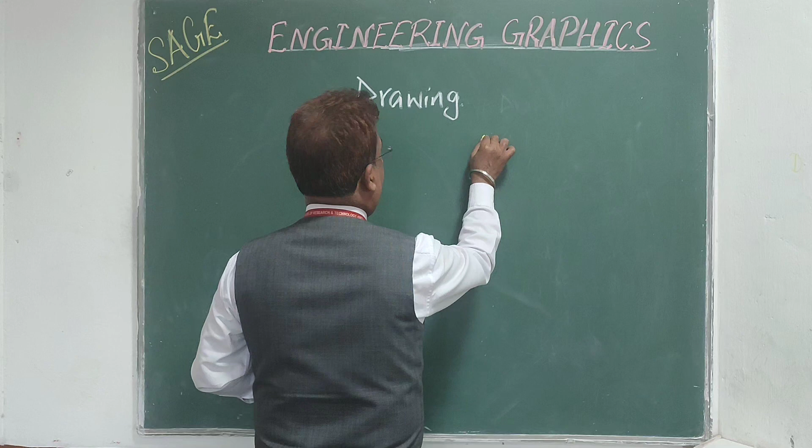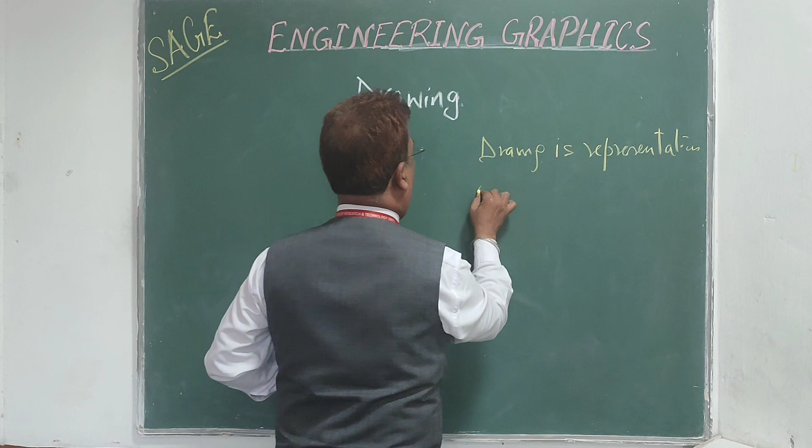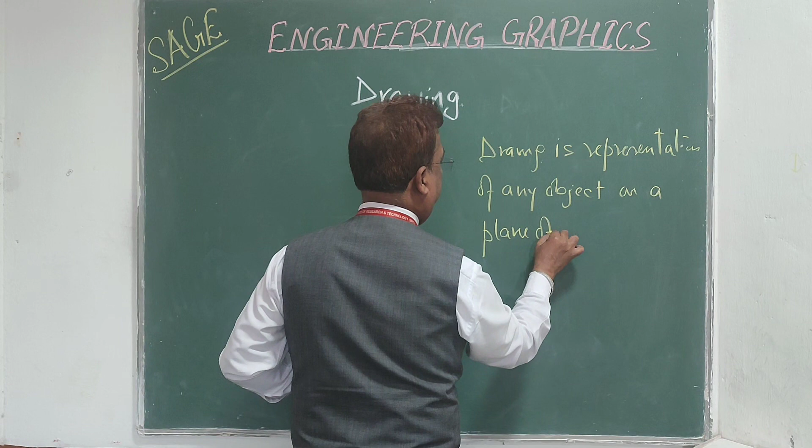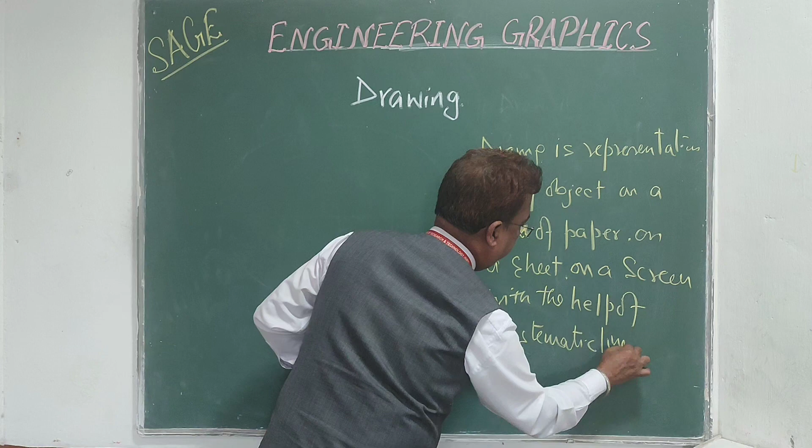So if I want to define drawing, the simple definition is: drawing can be defined as the representation of any object with the help of systematic lines. I am using this word systematic lines, which is very important. Drawing is a representation of any object on a plane of paper, on a sheet, on a screen, or maybe on this board, with the help of systematic lines.

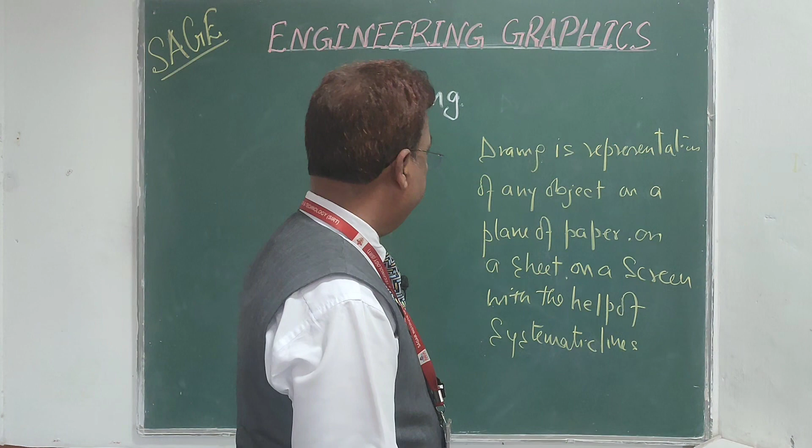I am giving stress on systematic lines because if you draw something systematically, then I can understand it. Otherwise, when a child draws lines on a wall or floor with a colored chalk or sketch pen, that may be a drawing according to them, but we may not be able to understand it particularly. So this word, systematic lines, is important.

As you know, when we study geometry in school, we draw geometrical figures. If you want to draw a square, there are 4 lines required, all making 90 degree angles with each other, with equal side lengths and equal angles. If you draw that figure without mentioning it is a square, I can see the figure and judge that it is a square. That is the advantage of using systematic lines.

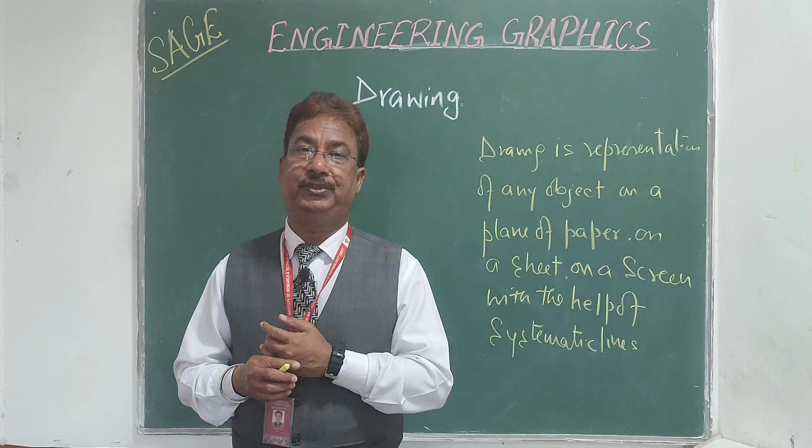It is rightly said that drawing may be one of the oldest languages a human can know. If you remember the earlier days, even during the Ashoka period, that language could not be studied by people. But from those drawings made by ancient people during the cave ages, we can still understand how humans were at that time, how the animals were, what type of weapons they used, and what agriculture they produced. So drawing is one of the ancient languages which is still readable.

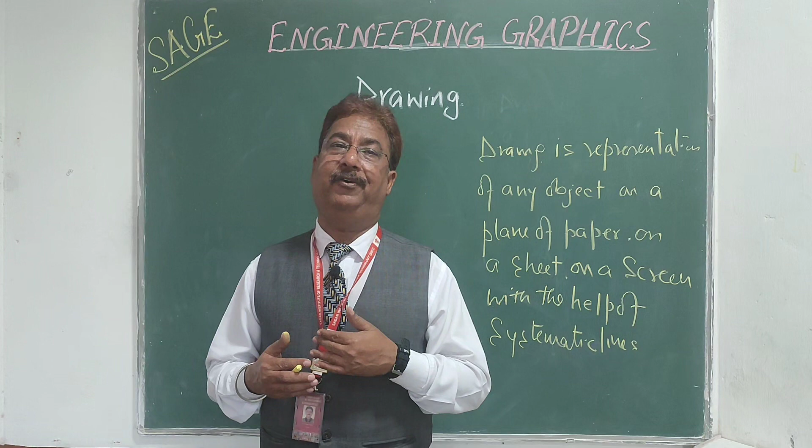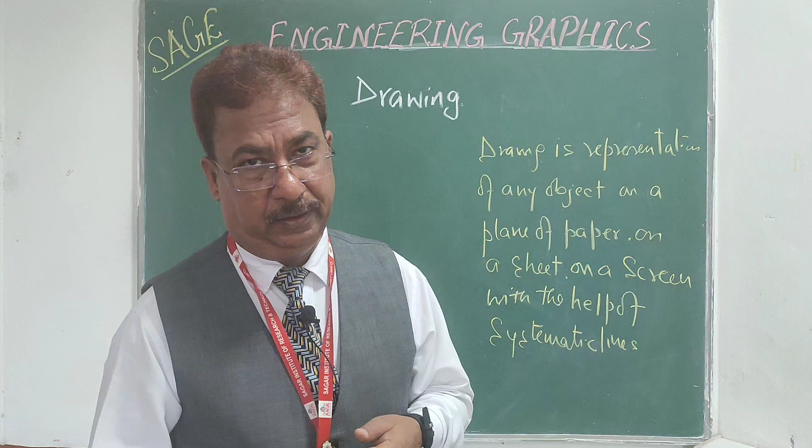Otherwise, many languages are now obsolete and we cannot understand what they have written. So if I consider written language, the oldest written language for human communication would be drawing. That is the importance of drawing. Also, whenever an idea comes to our mind, the easiest way to express that idea is with the help of drawing.

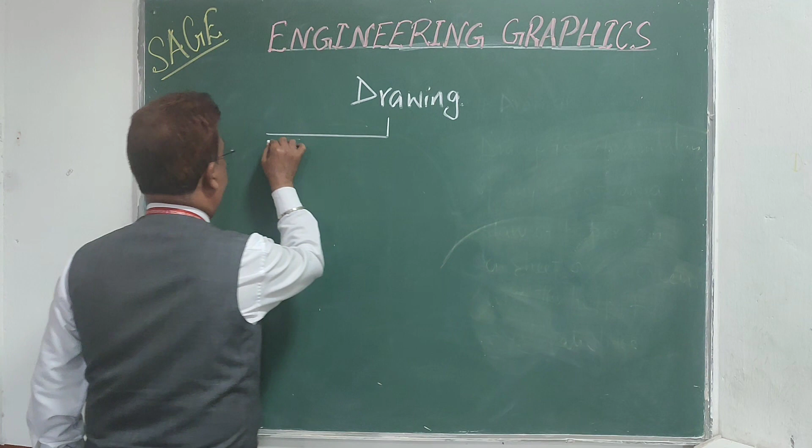Drawing can again be classified into two types. One is known as engineering drawing, which is our subject in engineering. And the other classification is artistic drawing.

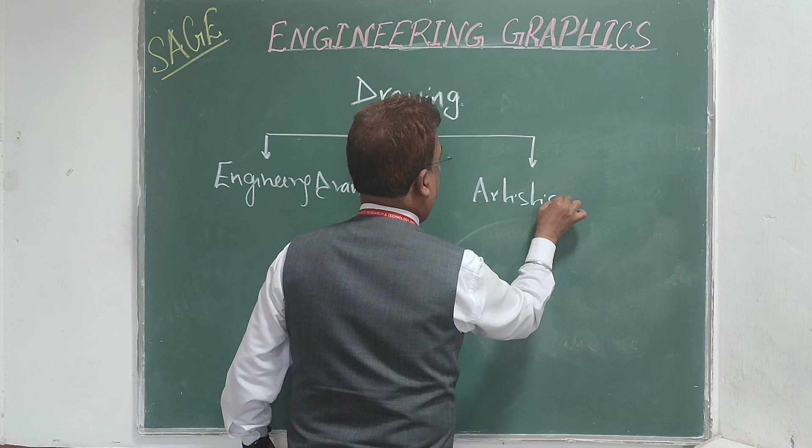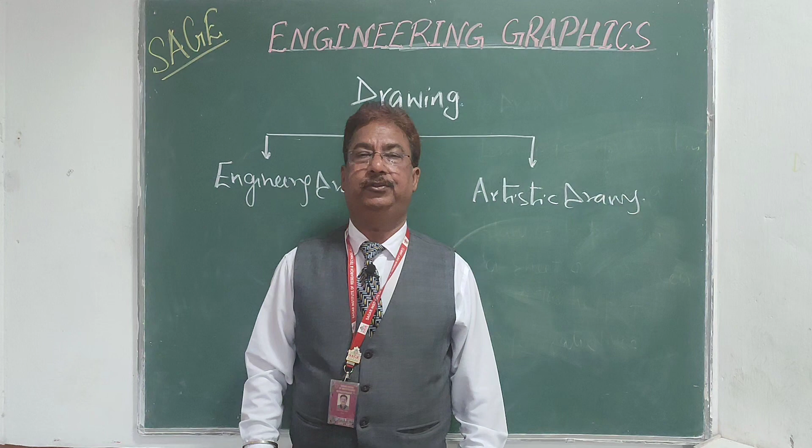Normally when we talk about the word drawing, if I ask how are you in drawing, what do you think about drawing, people will say that drawing means artistic drawing, the artist that can draw with the help of freehand.

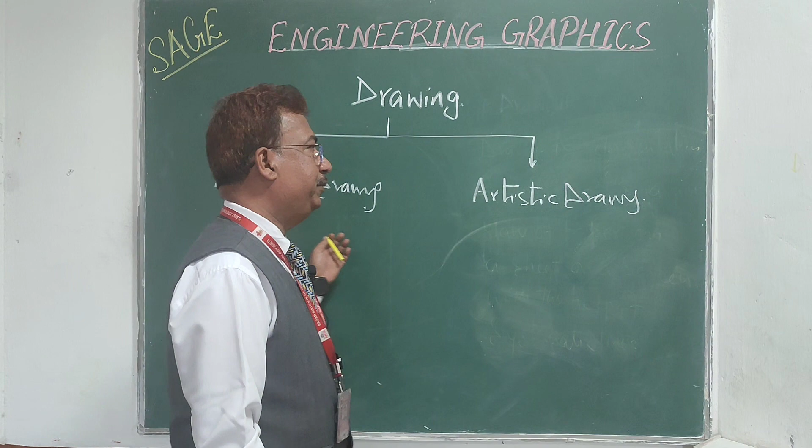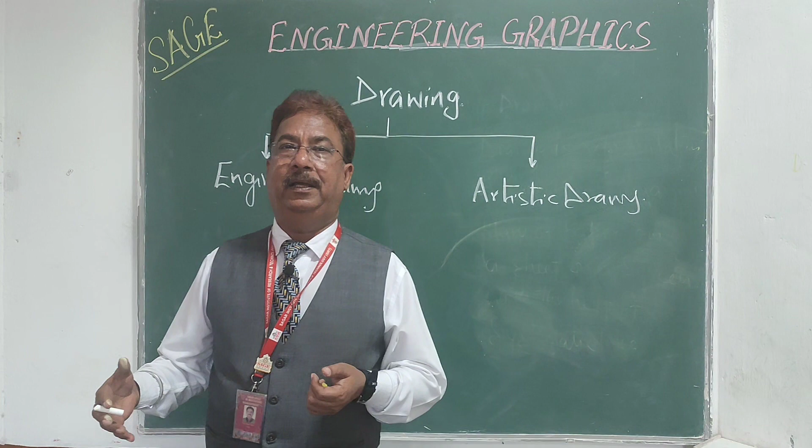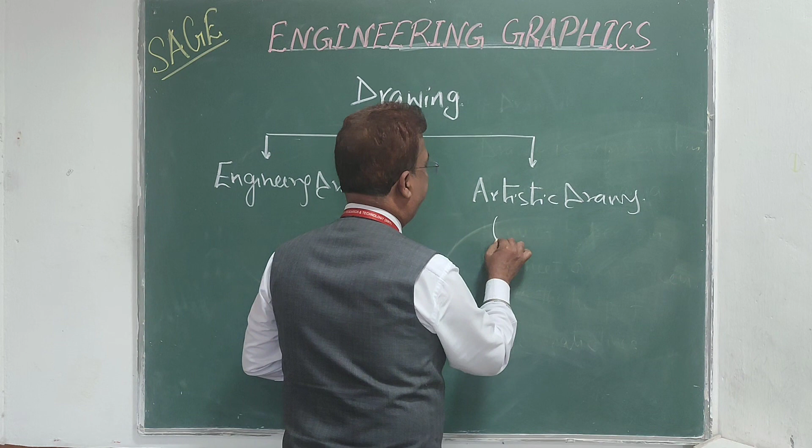But there are two types of drawing: one is engineering drawing and the second is artistic drawing. Sketching is one of the primary ways to express our ideas. If I have some idea about developing a machine, building a new structure, some thoughts are in my mind, so at the initial level what I can do is freehand sketching. This artistic drawing is one way to express our idea with the help of freehand.

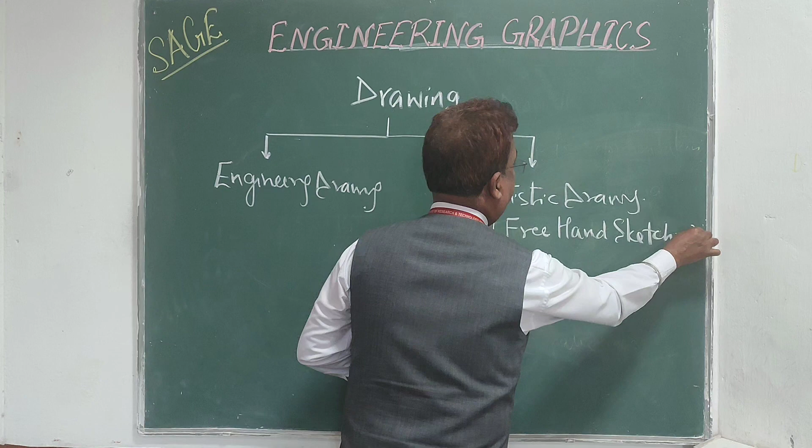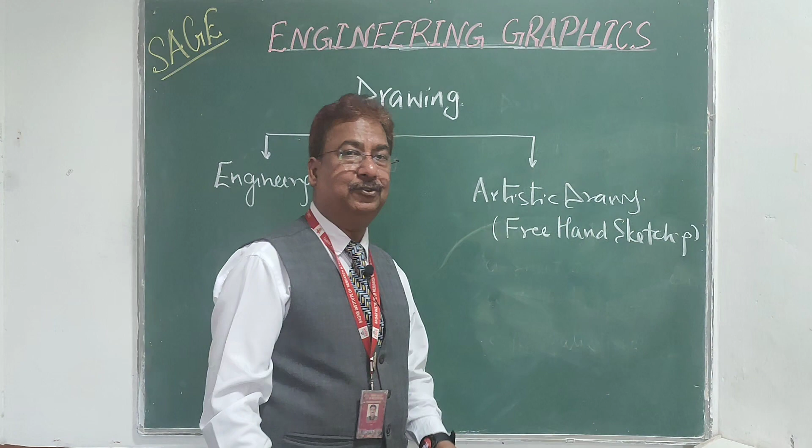So at the initial level, even in engineering, we can draw freehand sketching, but later on we finalize and fix that with the help of instruments and dimensions, and that drawing is known as engineering drawing. So the basic difference between these two is: artistic drawing is freehand drawing, and engineering drawing is drawn with the help of instruments.

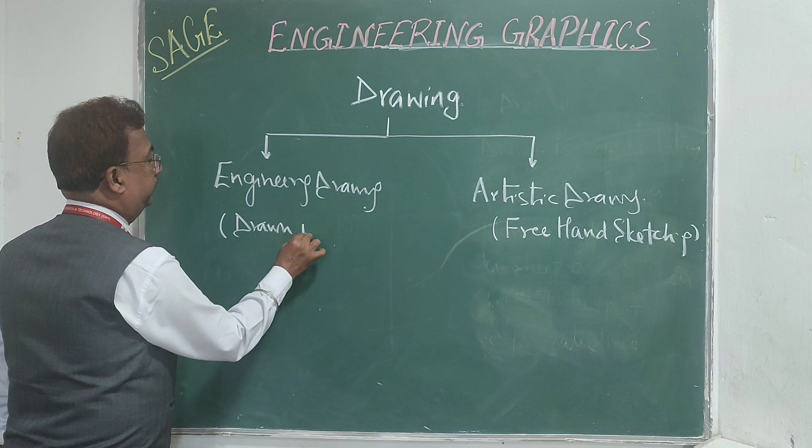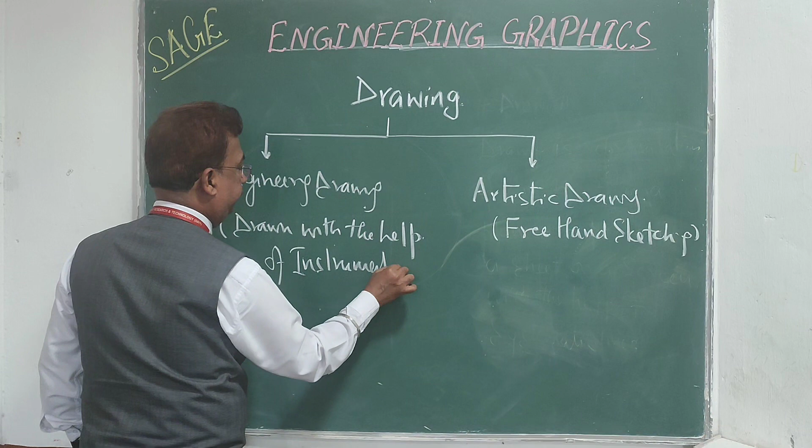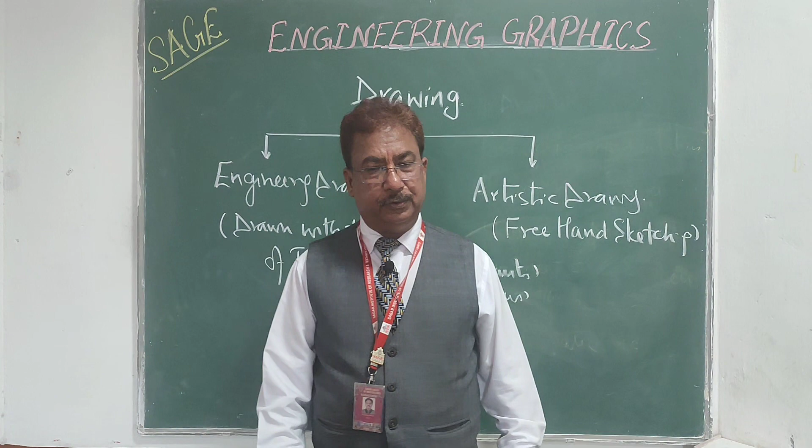And measurements, or you can say with the help of dimensions. So in engineering drawing we use simple tools, the same ones you have used in geometry. When you got the geometry box, there are a number of instruments in that box. Later on we will also discuss about that.

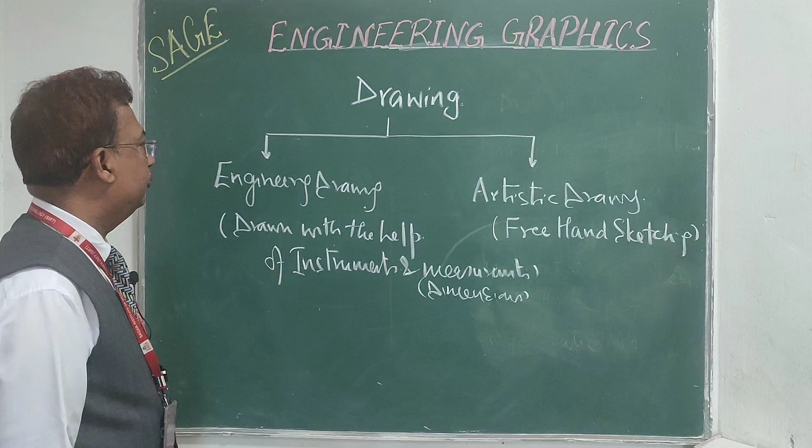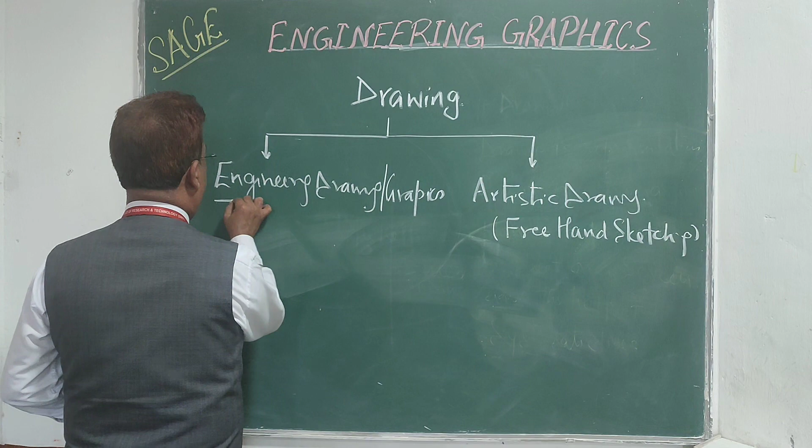So there are two types of drawing: one is engineering drawing, the second is artistic drawing, also known as freehand drawing. This subject is also known by another word instead of drawing, that is graphics. So you can also call it engineering graphics. This is our subject this semester. The code for this subject in RGPV is BT105, that is the subject code.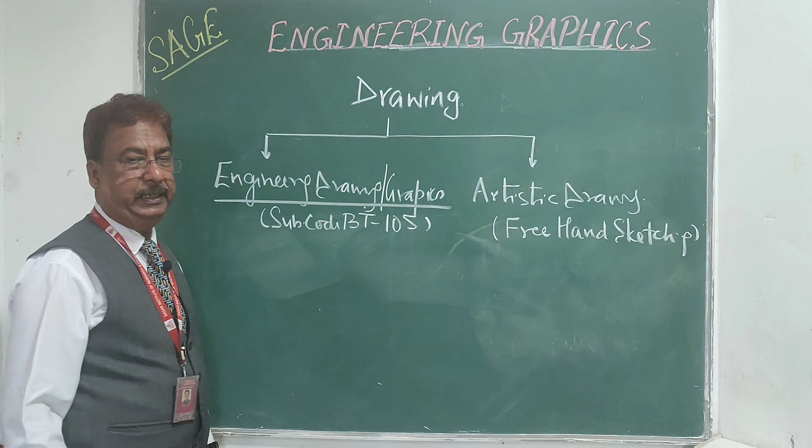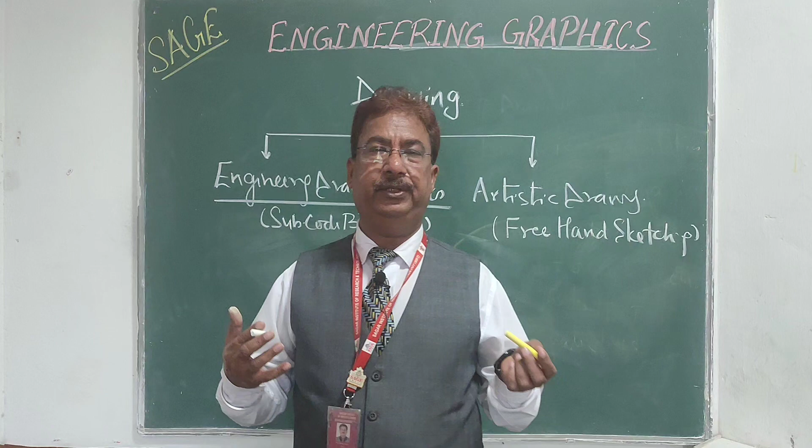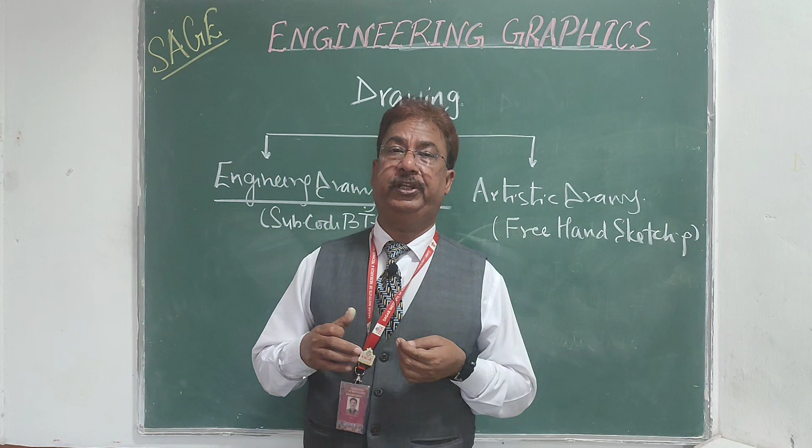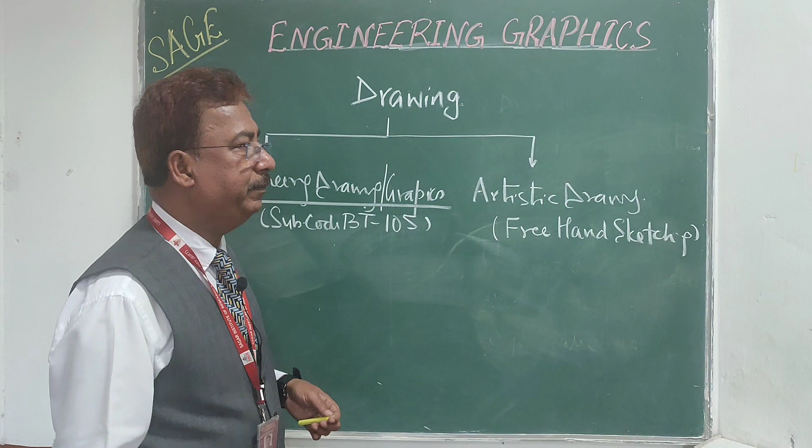When we talk about engineering graphics, as an engineer, the engineer is a creator, so whatever idea comes in your mind, you can bring that into reality with the help of drawing or sketching. Whatever imagination you have as a creator, or whatever new thing you want to design, in engineering and in designing, engineering drawing or engineering graphics is a very important subject and aspect for expressing our ideas and bringing them into reality.

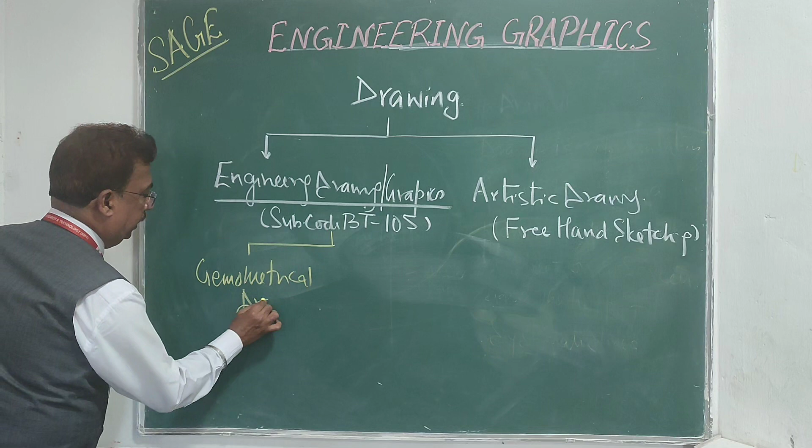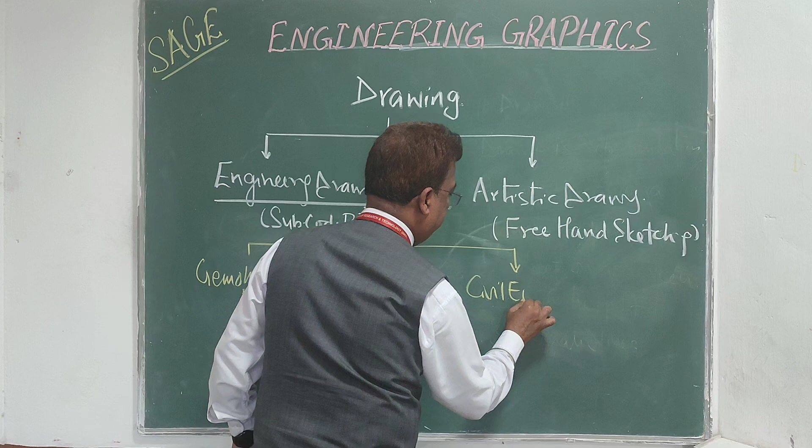So in engineering graphics, if we want to classify, the first type of drawing is known as geometrical drawing. This word geometrical drawing is related to geometry. Then another type, if you are from the mechanical side, is mechanical engineering drawing. You can also say civil engineering drawing. Then also electrical and electronics engineering drawing.

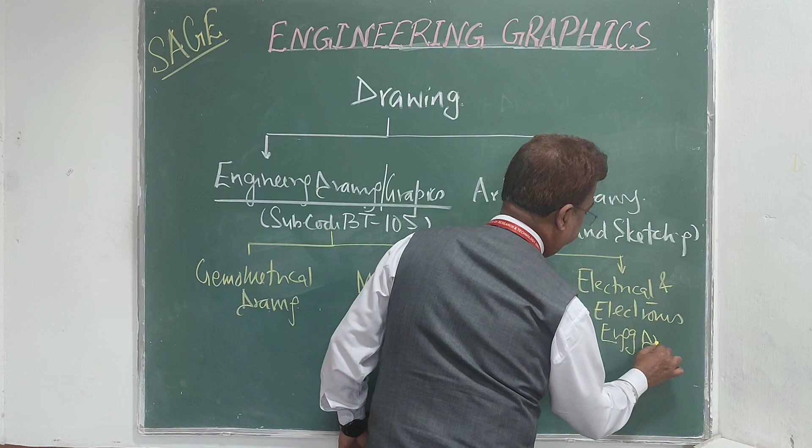Mechanical people will make drawings of machine parts and its components. Civil people will draw structures, buildings, bridges, dams. Electrical people will make drawings of different distribution of electrical networks and electrical equipment. Same way electronics people will draw different electronic components, PCBs, ICs, very small tiny components. In that case we will enlarge the size of the object and draw.

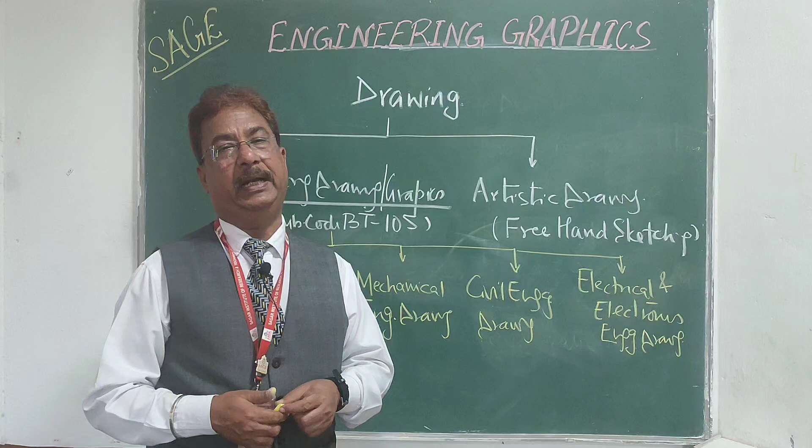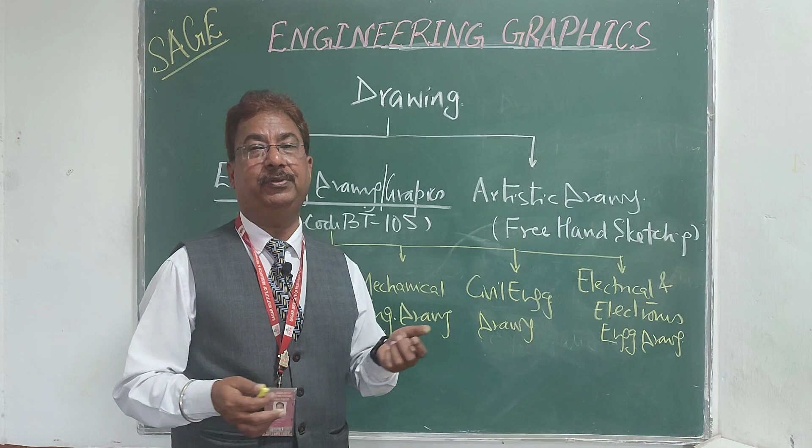So in drawing we can use instruments and dimensions, and if required we can enlarge the size of the object or reduce the size of the object. Civil engineers cannot draw any drawing at actual size, so they draw reduced size drawings, but electronics people will enlarge also. Same for mechanical people, they can draw at actual size, reducing as well as enlarging the drawing.

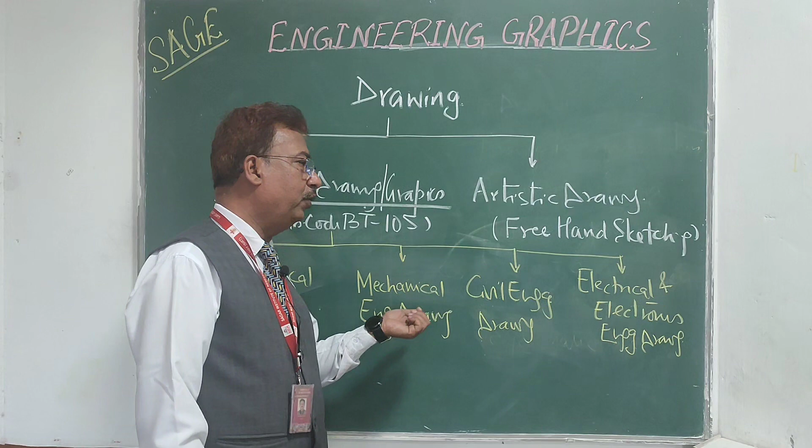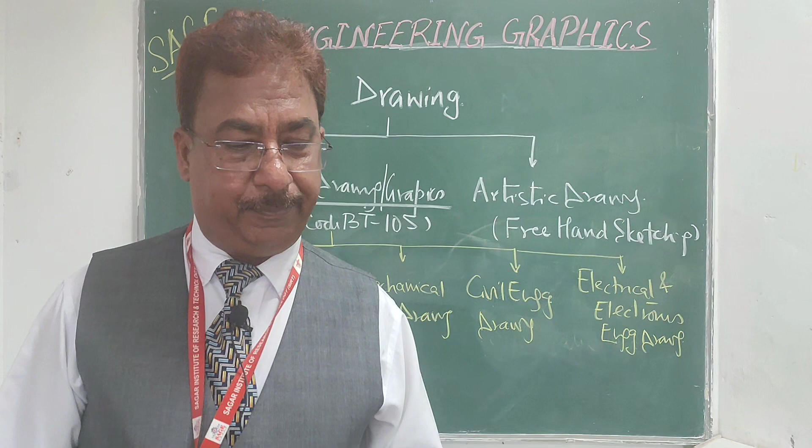This will be discussed later. In senior semesters, as per your subject, you are going to study mechanical drawing, civil engineering drawing, or electrical and electronics drawing. Right now, in this chapter, we are going to discuss geometrical drawing.

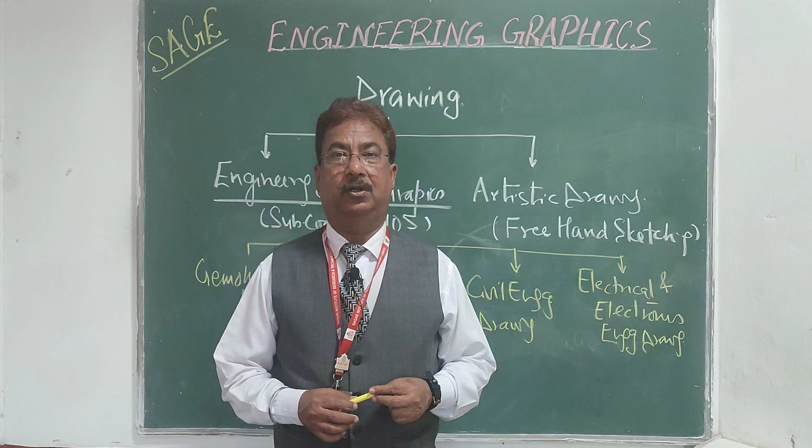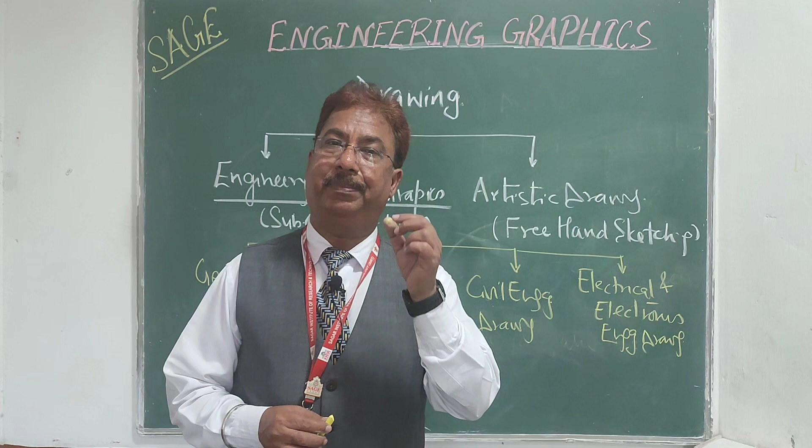Also, in computer science, if you remember, in earlier days when DOS based computers and systems were applicable, it was really difficult for a normal person to understand how to use the commands and different applications. But now all the applications and commands have particular icons, which are drawings of that icon. So that figure directly gives an idea—we can see the icon and understand what it is for. For example, a gear type symbol on a mobile or computer lets you easily know that it is the command for settings.

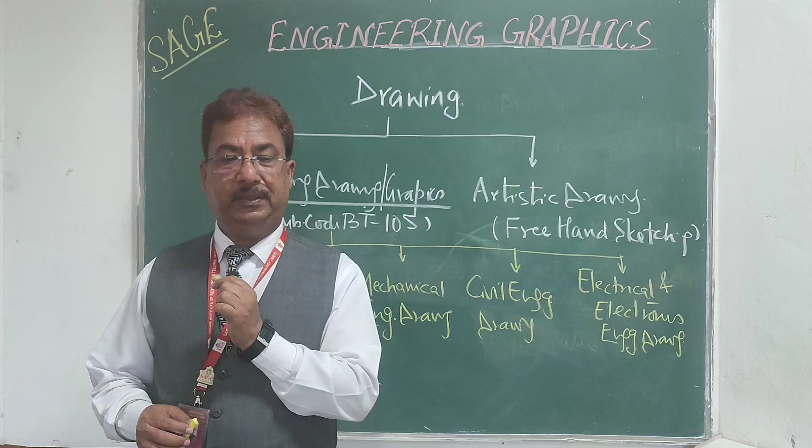In the digital world also, this drawing is more powerful and universal language, especially in the field of IT and computer. All those window-based systems, through one single icon, you can understand what the command is. That is the power of a simple drawing, simple notation.

Right now I am going to discuss this geometrical drawing, which is part of our subject, engineering graphics, in the first year. This subject is common to all branches - CS, IT, mechanical, civil, electrical, electronics, AI, ML, cyber security, data science - all branches in our institute and university will study this subject. Sometimes students have a predefined mindset that this subject is important only for mechanical or civil people. That is not true.

As I already explained, drawing is a bigger thing and will be a universal language for all engineers. If you want to express any idea, the best or initial way to express that idea is with the help of drawing.

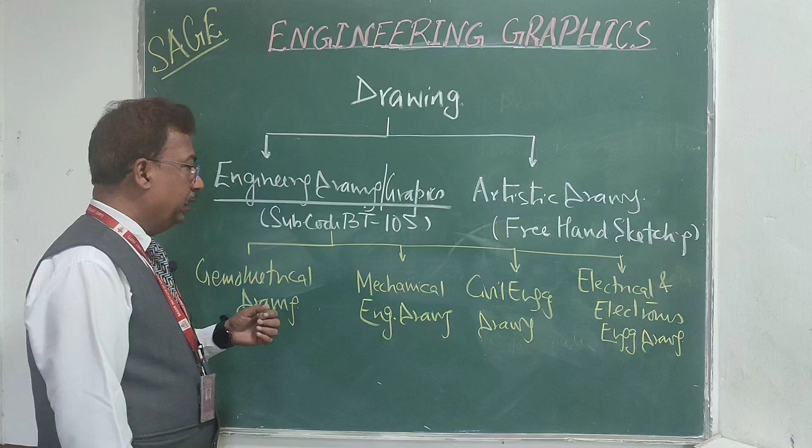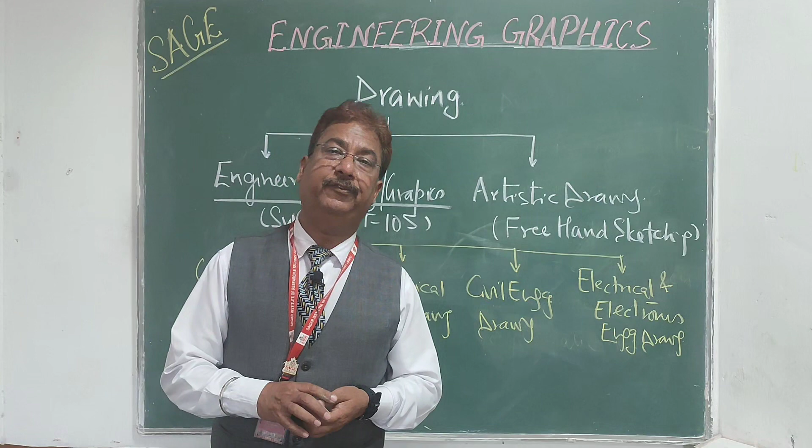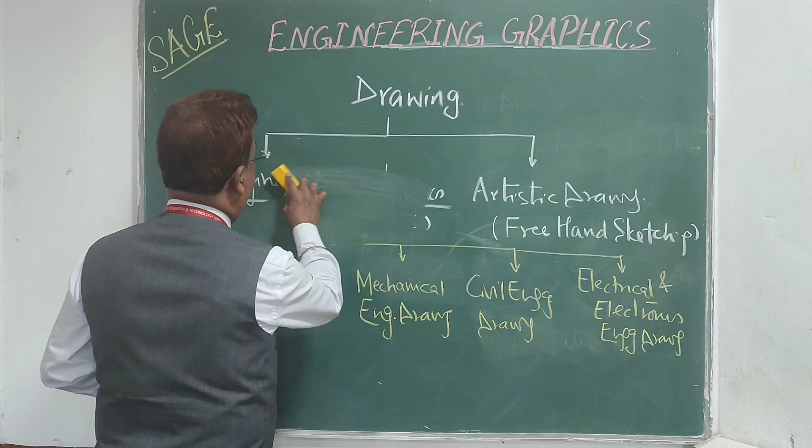Whenever we talk about geometry, the first reaction from students is about plane figures like triangle, square, rectangle, and sometimes they also talk about different types of solids they remember, like cube or cuboid. These are the types of geometrical figures.

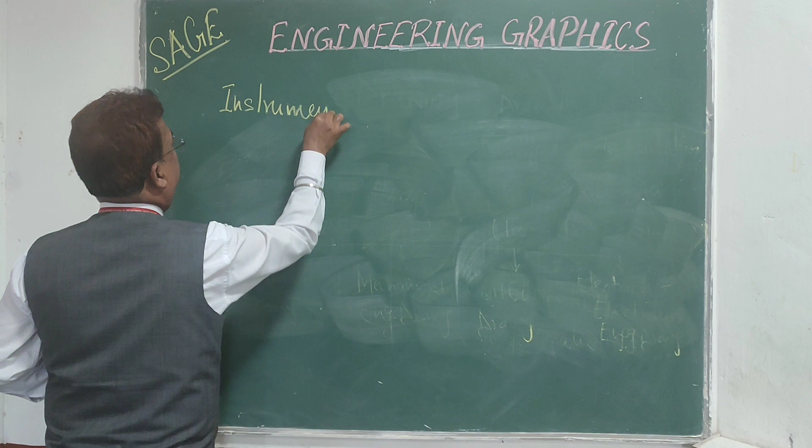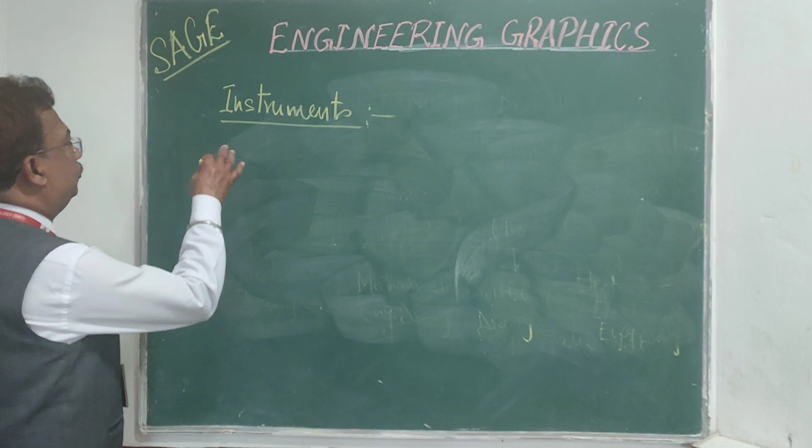In our subject engineering graphics, we are going to draw these different types of figures. As I already discussed, engineering graphics is drawing drawn with the help of instruments. So we require a few basic instruments apart from your geometry box instruments which you already used at school level. I am going to give you a brief idea about a few instruments required for this subject.

The first one for drawing will be a sketchbook - an A3 size sketchbook. Second, we need one unruled notebook. That is again important.

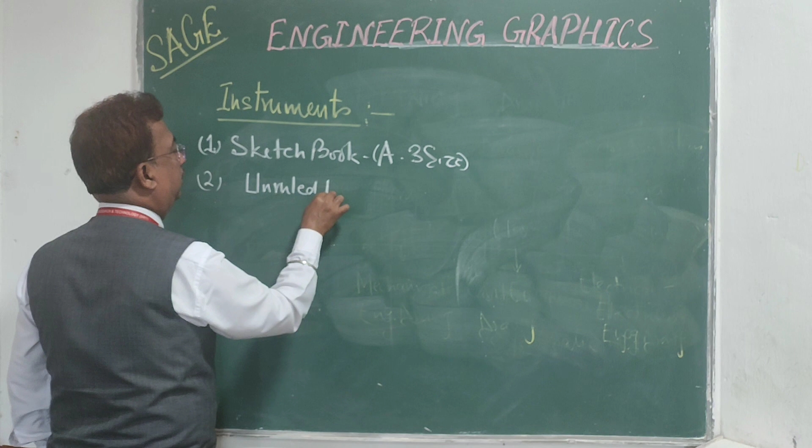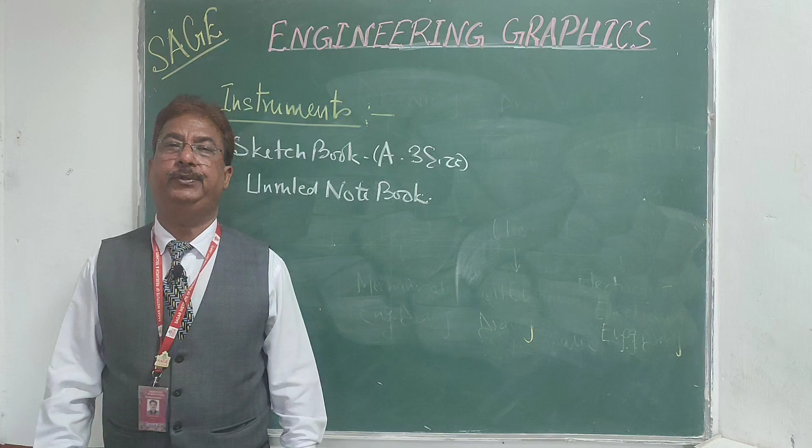We are going to draw all the drawings on unruled paper, not ruled paper, because in ruled paper you would end up using those ruled lines for drawing straight lines. Instead, we can draw in an unruled notebook, or sketchbook.

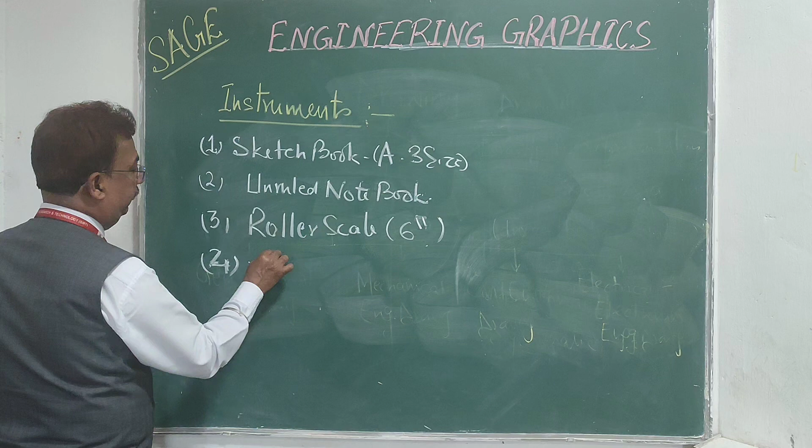The third instrument will be a roller scale, a type of scale used to draw parallel lines. This is available in different sizes - better go for a 6 inch scale. Then another scale you've seen in the market is a ruler scale - this time go for a 12 inch scale.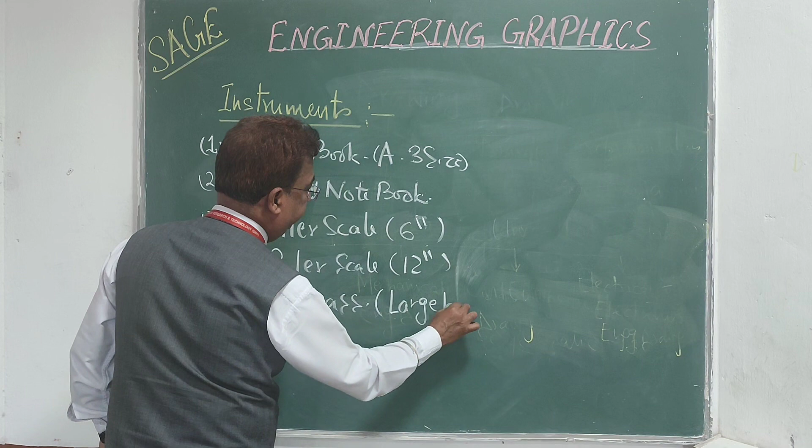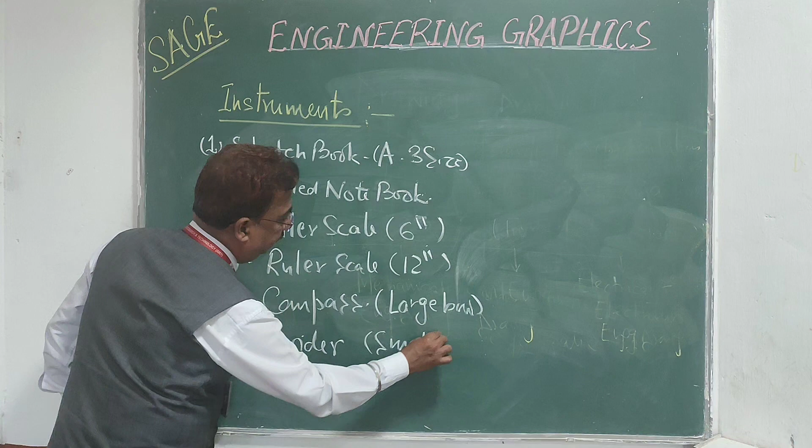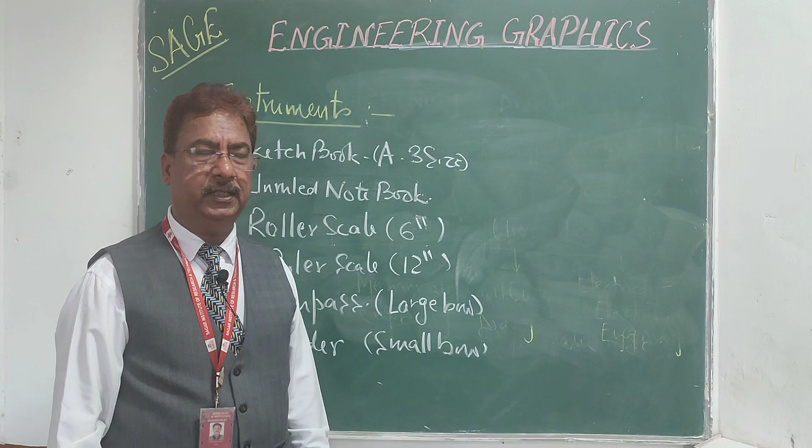Fifth will be a compass, used to draw arcs or circles - better go for a large bow compass. Then there's an instrument known as a divider - go for a small bow divider. Don't purchase a complete compass box, as many instruments in that engineering box are not useful for us. I am giving you specifically these instruments you have to purchase.

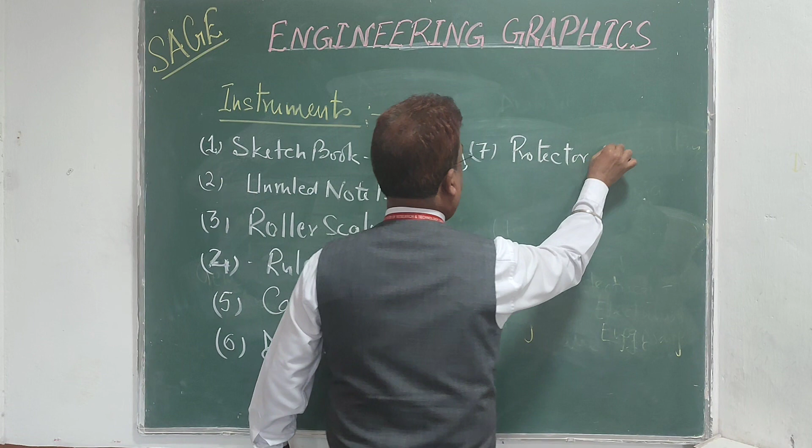The seventh will be a very well-known instrument to you, a protractor - go for a good brand, Omega. Then one instrument we will use is known as French curves, used to draw different curves to match various curve shapes.

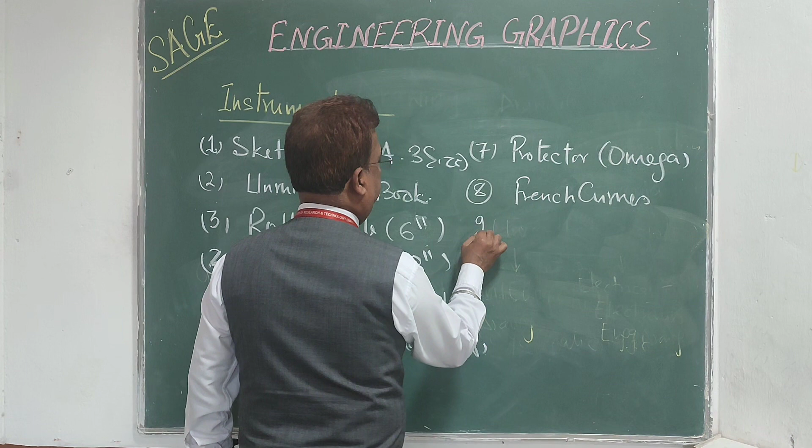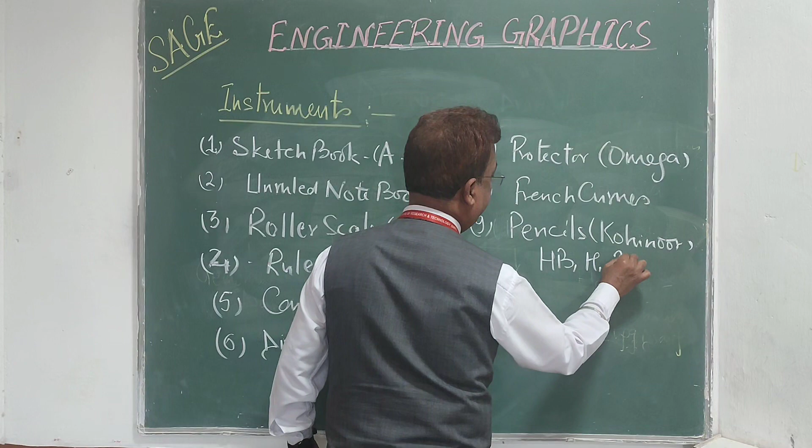Then pencils - pencils are the most important part. One particular brand we are interested in is Kohinoor brand pencils, and we require 3 grades: HB, H, and 2H - different grades for different types of lines we are going to draw in engineering. Then 10th will be a good quality eraser, and 11th will be a sharpener.

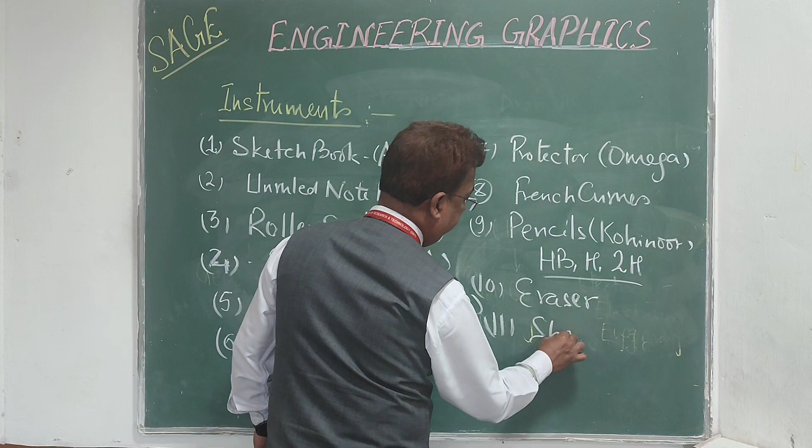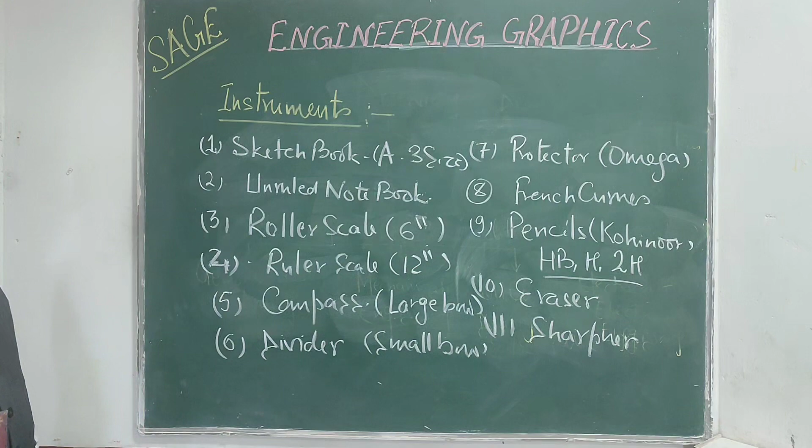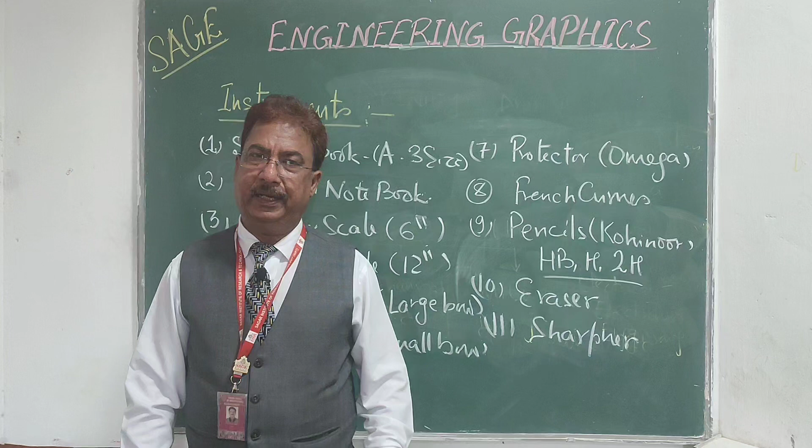So in the classroom, I normally require these few drawing instruments from you, and I hope you have a little idea about this subject. As I already told you, we are going to study geometrical drawing, which is part of engineering graphics. In the next lecture, I will elaborate on the subject and its syllabus. I hope you understand the concept and are ready for this very interesting subject in your coming semester. Thank you very much.